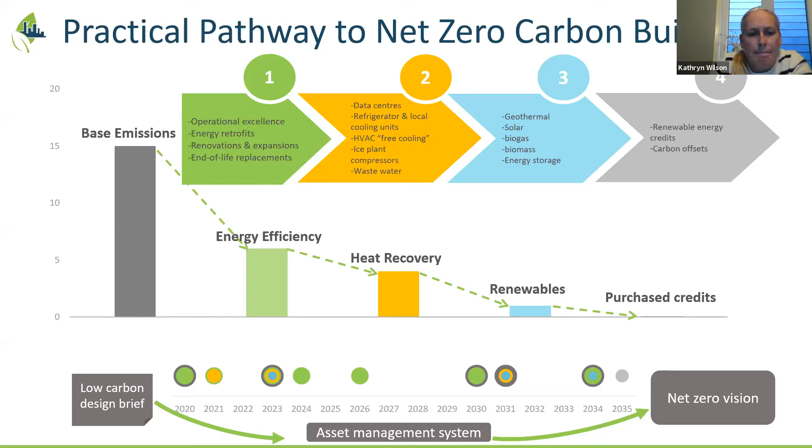Here are some of the objectives of the pilot.

So really to set carbon reduction targets for ice rink facilities, to determine a roadmap to achieving the targets in a financially sustainable manner, test the 4-phase approach that I just mentioned, and the net zero over time approach, build the case for low carbon measures by comparing business as usual with the best possible low carbon measures, introduce the integrated design process into measure development, compare ice rink performance metrics to evaluate ice rink building systems and identify opportunities for operational improvements and or better efficiency when replacing equipment, and support municipalities in planning equipment renewal in advance.

So lots of objectives here.

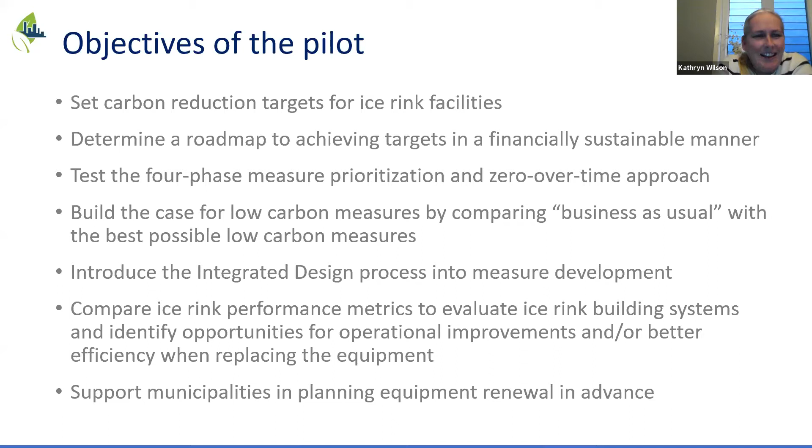I'd now like to turn it over to Frank Cammalleri to speak to the pilot. Great, thanks, Kathryn. Appreciate it.

Yes, so again, just reiterating and highlighting the challenging times we face today. This is a very important cohort project, and we're really happy to announce the findings that net zero carbon emissions is achievable and is financially feasible in municipal ice rinks, point blank. So that's a big accomplishment. We're very happy with the results of this, and we'll go into more detail further down the slides.

But it does require a more comprehensive evaluation of measures, looking at life cycle costing and accounting for total cost of ownership, like maintenance costs, timing of measures with capital renewal, and planned capital investments over time.

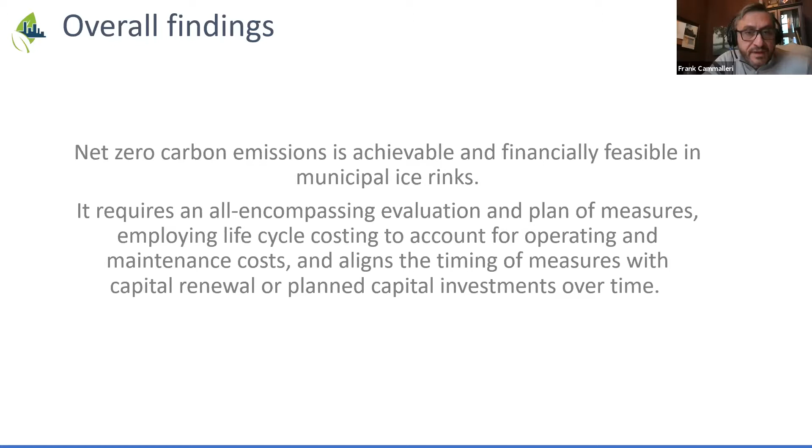So starting off with greenhouse gas emissions, sort of the big key aspect right now is that's really forcing us to focus on climate change here. So again, highlighting that quite considerable emission reductions were achieved with this study.

We see them hovering around closer in the 90 to 95% range on average before having to resort to purchasing carbon offsets. So we think that ice rinks and the findings of this cohort project have come to a very promising outcome that target emission reductions can be quite significant if you look at things from a low carbon perspective.

Want to quickly highlight a couple of anomalies or items that stand out. The 26% reduction in emissions - just want to highlight that ice rink number 9 only considered operational measures, so it's good to highlight why that is lower than the rest of them. In that specific rink, there was some uncertainty associated with the life of the complex past, say, 5 years. But it's good to know that just operationally, operational changes can achieve as much as a 26% reduction in emissions.

So great accomplishment here. We're really happy, and we're a little bit surprised, I have to say, that you could achieve such large emission reductions without having to resort to purchasing carbon offsets.

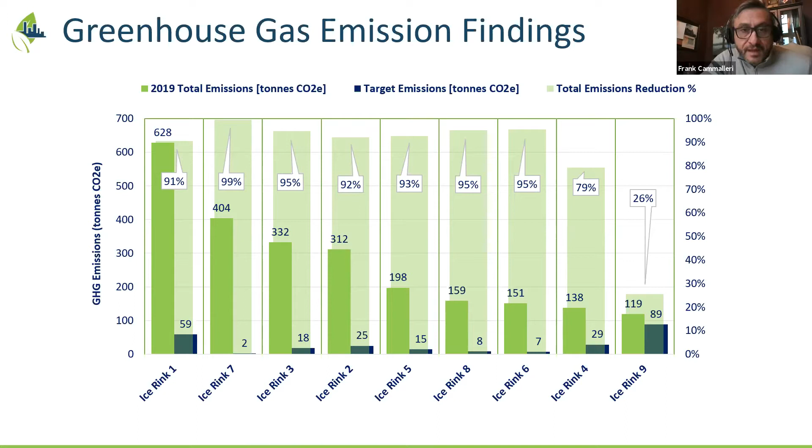As Kathryn mentioned earlier, our ultimate goal is energy emission reductions, but it starts with energy efficiency improvements. Findings show that through the 9 ice rinks that participated, we can achieve quite significant energy reductions, typically ranging from 58% to 85%.

This resulted in an overall energy use intensity reduction of 80.7% — quite significant. The approach taken was electrification, getting totally off of gas, or at least presenting options that would give municipalities the ability, a roadmap, to get totally off of natural gas.

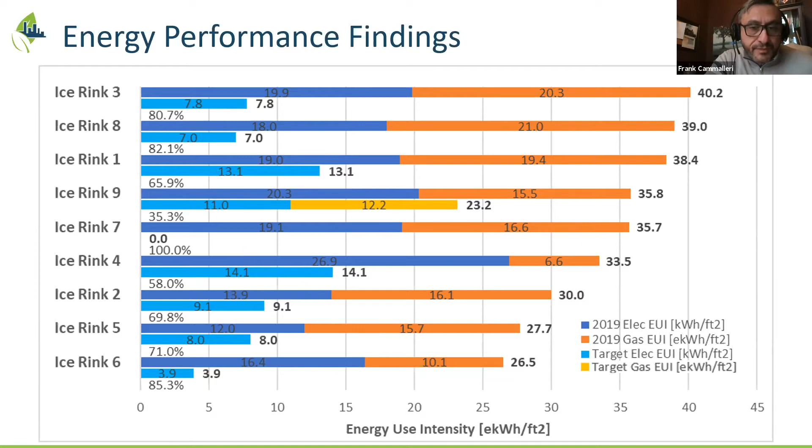Consistent with the FCM, Federation of Canadian Municipalities, approach, and supported by that program for this cohort project, we looked at 3 scenarios: the business as usual measure, the low carbon approach without funding, and, fortunately, with some good information from the release of funding, low carbon with funding, which was actually released in April this year. We decided to include that as part of the analysis as well.

Next slide. So, business as usual — a little background on that. What we included here were just standard like-for-like replacements with equivalent equipment, no optimization of existing systems. So when we refer to operational improvements, none of that was incorporated here. No heat recovery was contemplated in this scenario, nor were any renewables contemplated. It's the typical business as usual approach without considering any low carbon or high energy efficiency type measures.

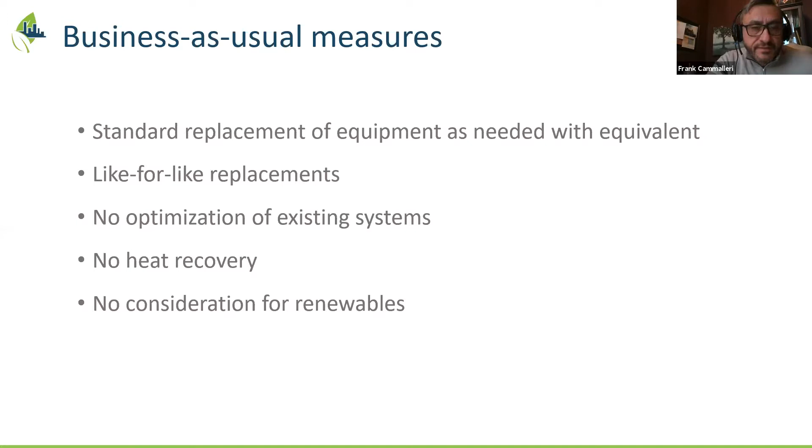Next slide, please. The low carbon approach without funding. Essentially, the approach taken for this scenario was looking at maximizing energy efficiency, using heat recovery, and replacement of equipment at end of life. That was the general approach we took. We implemented, or contemplated implementing, operational measures first, consistent with the four-phase approach Kathryn highlighted — making your building as efficient as it can be with the equipment you have — and then also taking into consideration measures that are both technically and financially viable immediately.

Things that come to mind are heat recovery, heat recovery on the refrigeration plant, as well as implementing a building automation system. So that's the point I'd like to make — that was the approach we took with this low carbon scenario, without funding, because it's self-sufficient without the funding that's currently available. Next slide.

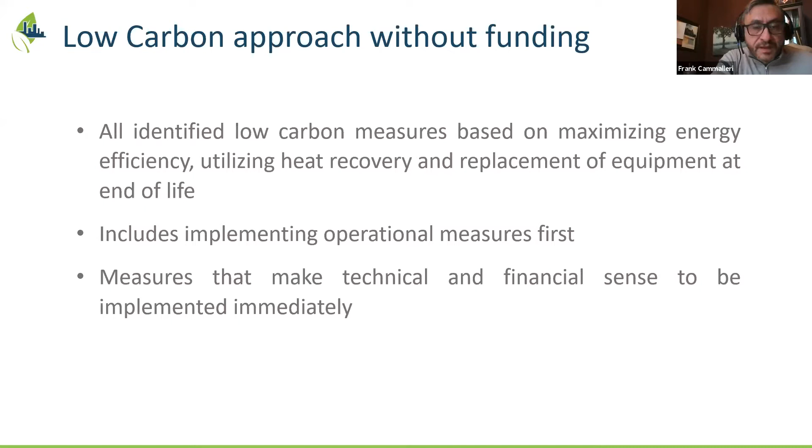So the low carbon with funding is essentially the same approach as the low carbon without funding, except that we're taking into consideration the GICB funding that's available. Most of you are likely aware of that, I know FCM - many of you are aware of that very attractive funding that funds up to 80% of the capital investments, but requires an accelerated implementation by end of March 2026. This generally accelerated the replacement of equipment before end of life. Typically, end of life equipment that may have been a few years out from 2026 was fast tracked to take advantage of this very attractive funding currently available.

Great, next slide. So starting off and highlighting the findings, the low carbon approach or creation of a roadmap really requires the use of life cycle costing and net present value. This is fundamental to the decision-making approach, and after working with all the participants, we found that this is fairly well talked about but not really used, and requires transformational change in the way decisions get made in capital and equipment replacement in order to get to net zero.

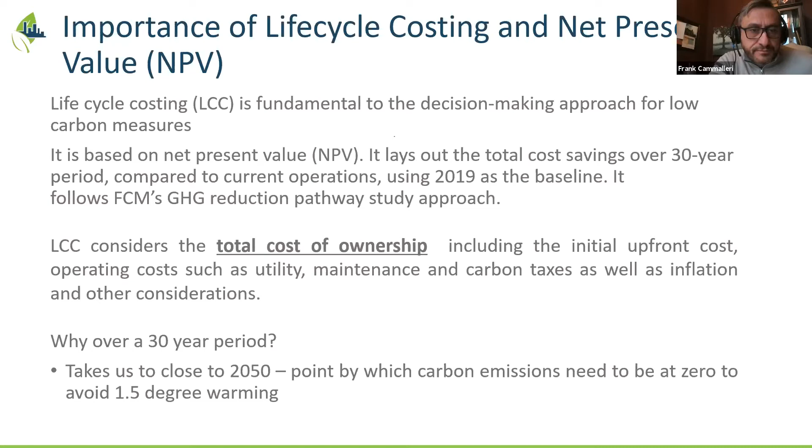Consistent with the Federation of Canadian Municipalities' approach required for their feasibility studies, we adopted that same approach, taking into consideration many factors. As I mentioned, life cycle costing is a fairly comprehensive approach. It takes into consideration inflation, as you can see there with the assumptions. This was the best information we had available at the time, so we take into consideration escalation rates in different utilities, electric and gas being the major ones, escalation rates in labor and maintenance, discount rate - which has to do with the time value of money - and again the amortization period of 30 years, which we talked about why we chose.

Carbon pricing emissions - we referenced a document published recently in the spring, the most currently available information we had while undergoing the analysis of this cohort project. We want to highlight that carbon pricing in reality is built into the utility rates, but it was very difficult and challenging to determine or get any forecasts from utility companies regarding electric, gas, and water rates that take into consideration carbon pricing. So we did quite a bit of sensitivity analysis to the escalation rates, and concluded that even with the sensitivity analysis, the outcome really wasn't any different, although the financials changed a bit - the decisions that resulted from it didn't change basically. We just want to highlight that's the approach we took in light of the difficulty of separating or keeping carbon pricing built into the utility rates.

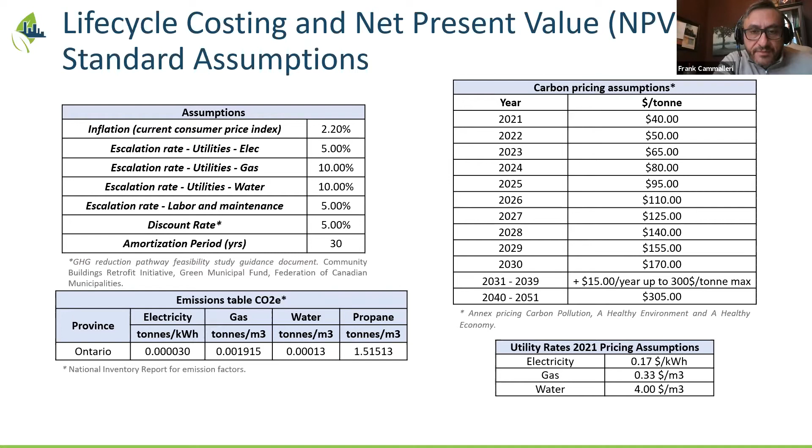Okay, next slide. So this is an aggregate of all the findings from the cohort project. We've broken it down by system type, and this is again an aggregate, an accumulation of all the ice rinks and the recommendations that were made for each one of them all together.

So we present the three options, the three different scenarios - we look at business as usual, the low carbon approach without funding, and the low carbon approach with funding. We've prioritized them, listing them in order of absolute carbon emission reductions, so you can see the refrigeration plant measures have the biggest emission savings from the cohort project. A good way to interpret this, now that we're getting into life cycle costing and the decision-making process, is that the approach essentially took the cost in today's dollars with respect to the current state of the facility.

So in the business as usual scenario, you'll see negative net present value because you'll be replacing equipment without any savings associated with it. That's why you see a negative cost there, a negative NPV, because you're actually replacing equipment without any savings to offset that cost.

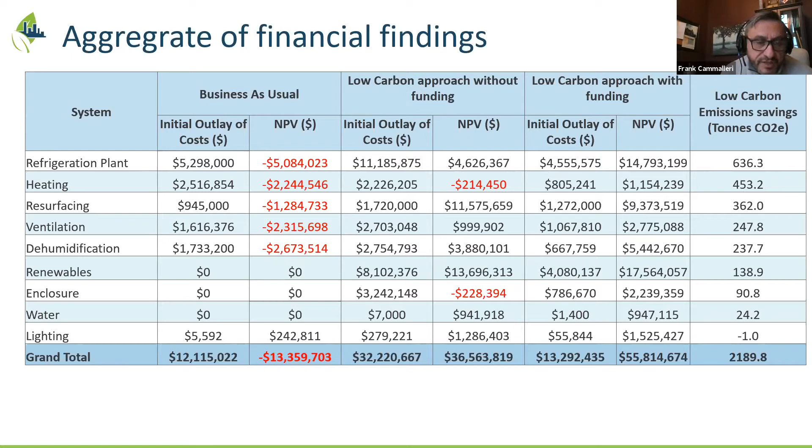This whole approach we've highlighted from the beginning is really about carbon reduction over time, trying to do so in a sustainable manner. So let me explain this graph a little bit. This is over time, over the 30-year period we examined from 2021 to 2051.

The business as usual is the green line. You can see on the vertical axis there are emission reductions. For sake of simplicity, business as usual assumes no emission reductions over the current systems that exist. Then there's the low carbon approach without funding, the darker blue line.

You can see that gradually over time you get quite a bit of reduction, from 400 down to 45 — 45.9 in 2036 — and eventually down to zero by around 2041, specifically 2.4 tons of CO2 emissions in 2050. Again, this is just a sample participant roadmap, if you will.

The lighter blue is the low carbon with funding. Basically, as we mentioned earlier, because we're fortunate enough to have a fairly attractive funding mechanism available, the green and inclusive community buildings funding available that pays up to 80%. The recommendation we made is we fast-tracked a bunch of the capital expenditure, so you can see a lot of the carbon reductions happening a little bit early, because instead of waiting for end of life to replace the equipment, you have this incentive, this funding mechanism that's very attractive, paying up to 80%. Fast tracking it by 2026, there's quite a bit of work that gets done, and you can see the carbon reductions accelerated quite considerably between the dark and the blue.

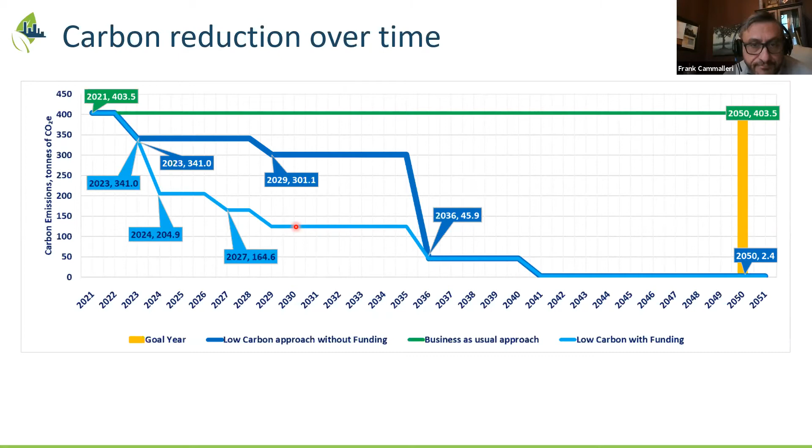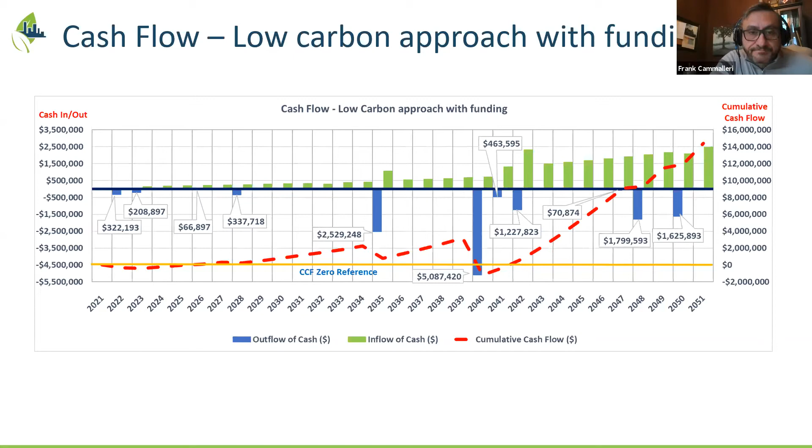Okay, so just a little bit more about the wide range of different participating ice rinks. There were nine ice rinks that formed part of this cohort project, but many of the ice rinks ranged quite considerably from one to the next. So we've got a good cross-section of the spectrum of different types of rinks out there, and we think we've got a good cross-section of what's out in the marketplace.

So a couple of items we wanted to highlight is they varied quite a bit in terms of ice pad square footage. You can see that it goes as low as 15,000 on ice rink number 8, right up until ice rink number 1 as high as 65,000. That becomes there's more ice pads, but generally the ice pads, even the size of the ice pads, varied a bit from one to another. A lot of the ice pad area differences come from the fact that they have more than one ice pad, or they have a combination of a curling rink slash ice rink pad.

Moving along on the columns, the area I like to focus on is the gross floor area. Gross floor area ranged quite a bit, from ice rink number 9 around the 35,000 square foot range, which was mainly an ice rink with very little amenities - the main focus in that facility was just the ice rink, really, with a couple of meeting rooms and so forth. But as high as, in some cases like ice rink number 1, 151,000 square feet, which included several ice pads, but not only several ice pads, but also many other amenities like fitness rooms and community rooms and so forth.

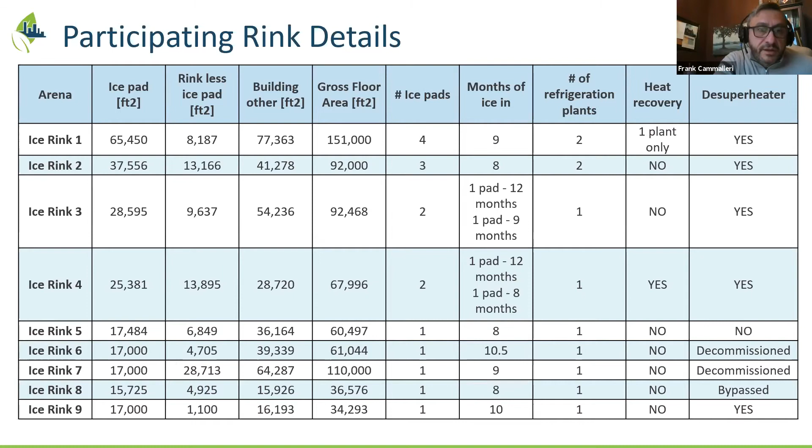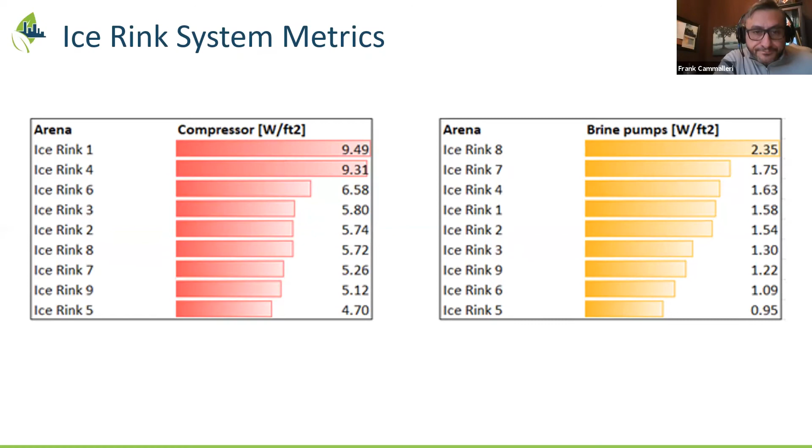Okay, next slide. Just continuing on with other key equipment there - dehumidifiers, again similar approach here. We got some ice rinks where the metrics are quite low, 0.12, 0.22, and most of them have no issues achieving the set points that are required.

But we want to highlight ice rink number 7. It's a bit of an anomaly in that sense, because it's a fairly large facility that is part of the OHL circuit, with a huge spectator area. So that's why you see it standing out, because it's combining dehumidification with ventilation requirements for the spectators. Again, just wanting to highlight that anomaly, but also give you some idea of how potential oversizing could occur in the other rinks.

So if you remove that anomaly, you can see the wide range of CFM per square foot of ice pad for these rinks, going from as low as 0.12 to 0.51, and the same thing on the fan side. Just showing that there's definitely oversizing going on, and those things need to be questioned every time, especially for end-of-life equipment.

What is the right size I need? Don't oversize things. And how do you deal with it in the meantime while making the most use until you get to end-of-life replacement? Same thing on the lighting pieces - you can see quite a bit of range of watts per square foot intensity. You see on the lower end 0.23 and 0.3. Most of those facilities have already converted most of their lighting to LED.

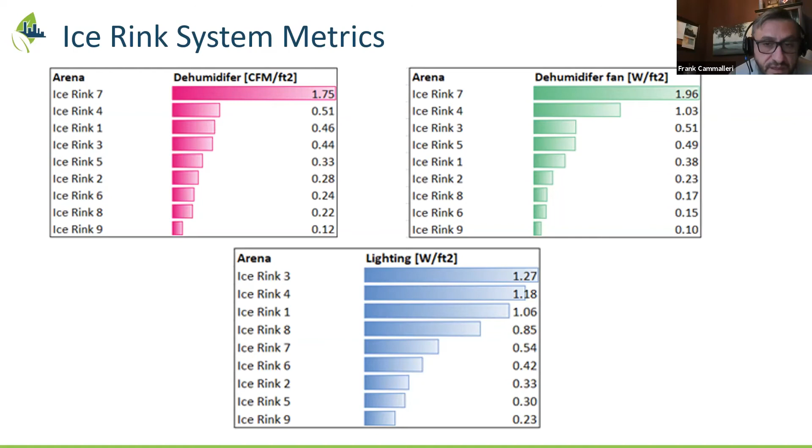It's also important to say that this natural tendency to over-design to be safe exists everywhere, including in lighting. Many facilities, even rinks 7 and 8, have LED lighting, but you need to question whether the conversion was done properly. Oftentimes you can end up with intensities twice as much as needed while still meeting the same light level requirements per building code and standards. So always question that, and make use of metrics to help make decisions when replacing equipment or redesigning, to ensure an optimal design, not extremely oversized.

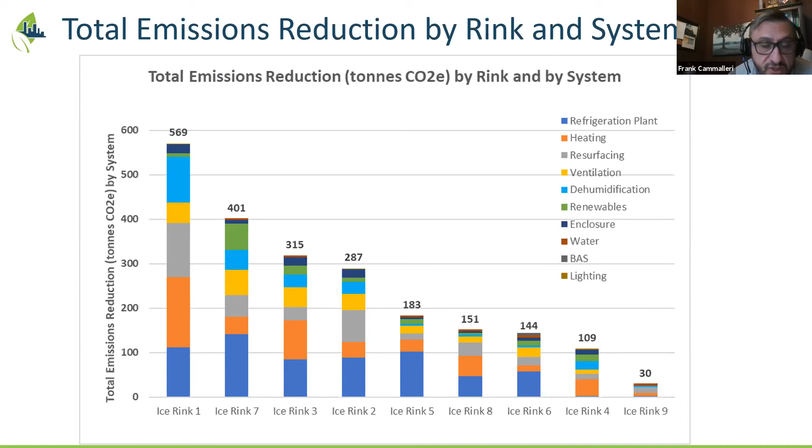Okay, next slide. This is total emission reductions in absolute value. Ice rink number 1 had the biggest absolute reduction, as much as 569 tons. Ice rink 9 shows mainly operational recommendations were made, still getting 30 tons, highlighting the many different systems that exist in a facility and where most of the emission reduction lies. You can see the refrigeration plant, the dark blue bar at the bottom, is one of the more significant ones, followed typically by heating. This is a cross spectrum of how each facility achieved reduction and the absolute magnitudes associated with each one.

Okay, next slide. This is the average savings associated with each system type, consistent with how we've listed them. The refrigeration plant on average in aggregate saved 29%, responsible for 29% of emission reductions, followed by heating at 21%, then resurfacing at 17%, followed by ventilation and dehumidification, and eventually lighting. The big contributors to emission reductions are really the refrigeration plant, heating, and resurfacing. We'll get into more detail on the measures, and the types of measures being recommended and considered under these categories.

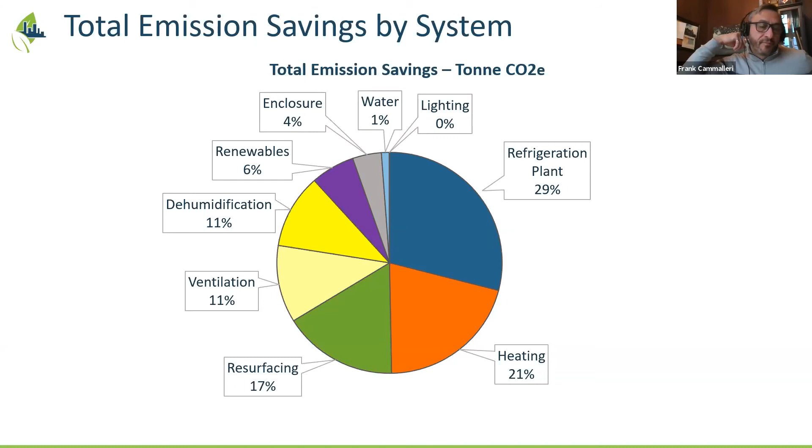Okay, next. Sorry, next. Yeah, there you go. So those were some high-level findings in terms of the cohort project and the individual ice rinks, and we'll get more into the individual measures.

Some key recommendations after completing this cohort project: the importance of getting organized, gathering data and documentation. We obviously had the pandemic to deal with, which complicated things further, but it emphasized even more how important getting organized is, and getting everyone involved. That's why this cohort project is turning out to be successful, as we're seeing many municipalities actually proceeding to implementation. It involved an integrated design process, aligning with the objectives, getting facility managers, capital folks, and operators involved in the decision-making process along the way, so everyone gets an opportunity to voice their concerns and you get buy-in, so it eventually gets implemented.

Also, understanding life cycle costing throughout this. We've had several discussions with municipalities; many people were exposed to life cycle costing, but none were implementing it to the fullest extent, not to the extent of using it to make decisions. We're happy that many were open and amenable to using that model, because that's the model you need when looking through the lens of trying to get to carbon zero, carbon neutrality. Quite a bit can be achieved with operational type measures - implement them right away, since those are usually low-cost or no-cost. Another really important finding: integrate the refrigeration plant with the other building systems, since they were very much operating in silos.

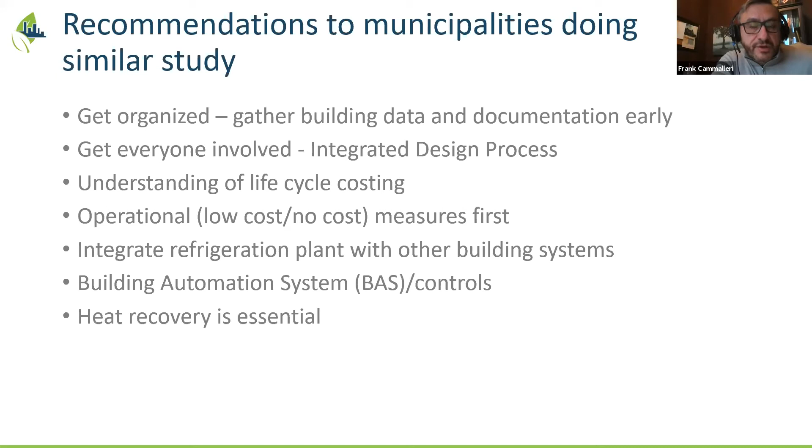Next slide, a little bit more on getting organized. We understand there are a lot of existing buildings, and it can be a fairly overwhelming task, but there are a lot of things that can be done in the meantime to get started.

These are the areas we'd recommend starting on immediately or as soon as possible, even if you may not get to these buildings for 2 or 3 years—really start getting the buildings and information ready that you need for performing the analysis. So building performance data, getting monthly data, interval data if available, the last couple of years, is always very helpful and useful for doing the analysis required to create a roadmap.

Tracking the performance is very, very important. Critical to this, as part of the cohort project, is the need for looking at the mechanical systems—the refrigeration systems are important. So assembling those drawings and having them readily available, so that when it comes time to do a more detailed roadmap, they're readily accessible.

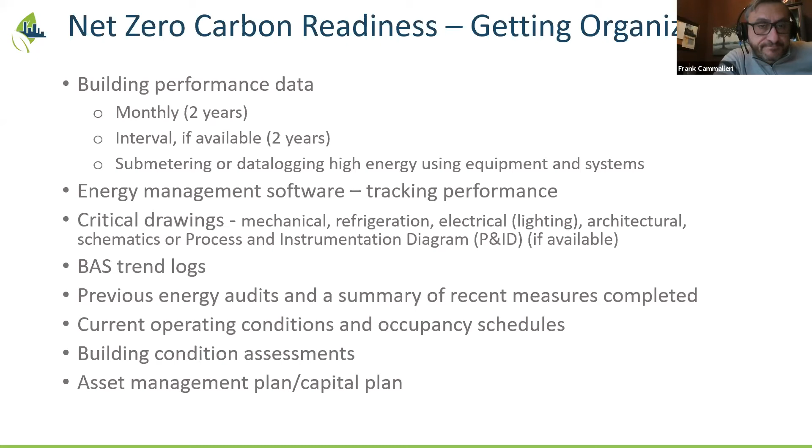To talk about this integrated design process—again, I mentioned it a bit beforehand—it's really getting everyone at the same table: the facility managers, building operators, energy managers, asset management, including the financial folks, the building modelers we had, and in conjunction with the technical advisory team, we had many players at the table throughout this whole process, and that's what makes it successful.

Having everyone at the table getting the expert advice you can, bringing them all together so people can ask questions and get their perspectives heard, and get concerns addressed as soon as possible, significantly improves the chances of success of making this roadmap work—so it doesn't just sit on a shelf, it's actually doable, and you get buy-in from all players.

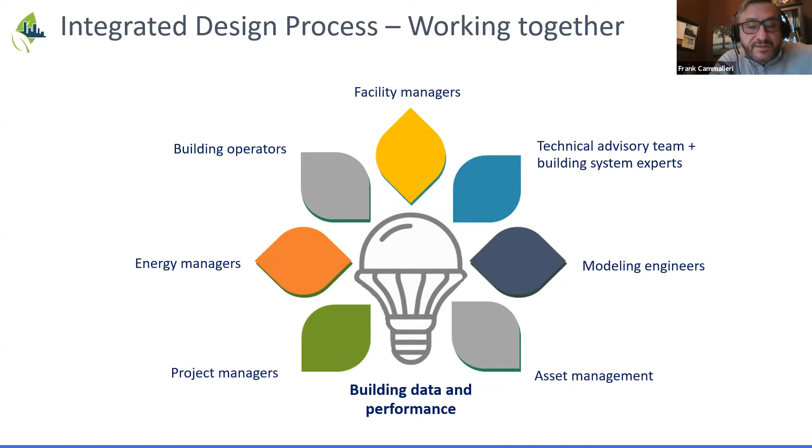So again, just highlighting this is a common theme in the program itself, and was, we believe, successfully used at this cohort project. Next.

So again, the continuous focus is on trying to do the operational low-cost measures first. Some of these items include optimizing ice temperatures based on ORFA recommendations. This is just a sample of a schedule that could be implemented, resetting the temperature up at night, up to 25, 26 degrees. Following ORFA standards, and what we've seen some rinks actually accomplish, adjusting ice thickness where possible to closer to 1.25 inches.

Again, you need to look at this with respect to your specific facility: adjustment of humidity set points, scheduling of buildings to operate just when needed, controlling light levels based on the activity type, whether it's a maintenance exercise or in between events, and reducing the need for water flooding by optimizing the amount of water used during the flooding process.

In all of this, especially in the operational pieces, operator training is critical. It's very easy to just make these recommendations and walk away. What's needed is actually working closely with the operators, understanding what concerns may arise initially, and dealing with them as they come, so operators have support along the way to make sure these measures get fine-tuned and end up being sustainable. That's really important.

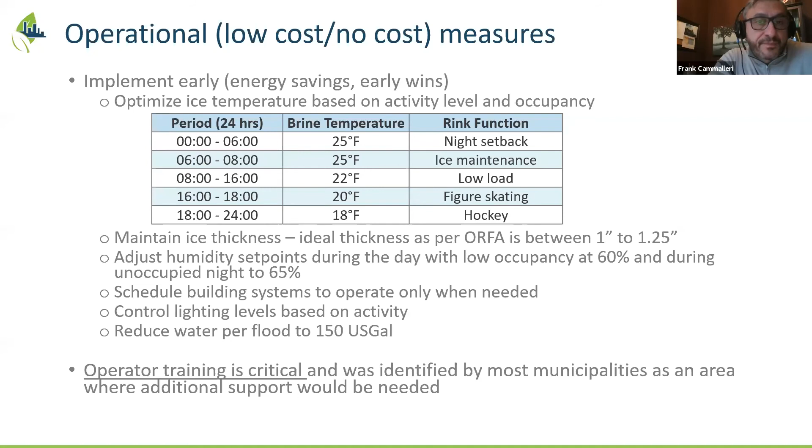I mentioned several times, building automation is critical. These days you need smart operations to make a building efficient. On some site visits, we had quite a bit of a mishmash of different types of systems out there. Many of the buildings had a control system on the refrigeration plant. What was very challenging was remote access, so hopefully ironing that out and figuring out how to get remote access early on is important.

I wanted to highlight that none of the systems were really integrated, the refrigeration plant with the building HVAC system, so they kind of operated more in silos. Many of the facilities didn't have a building automation system for the rest of the facility. So some key observations, and the importance of getting the BAS into these systems as soon as possible. The strategies needed optimization, and we realized that even buildings that did have BAS weren't optimized, which is very common, not fully taking advantage of occupied and unoccupied smart strategies. Definitely an opportunity for improvement.

There's also a need for setting up trend logs and archiving. We found that systems with a good refrigeration control system had some good trend logs, but many didn't. So we recommend setting up these trend logs and making sure they're archived for future reference. Next slide.

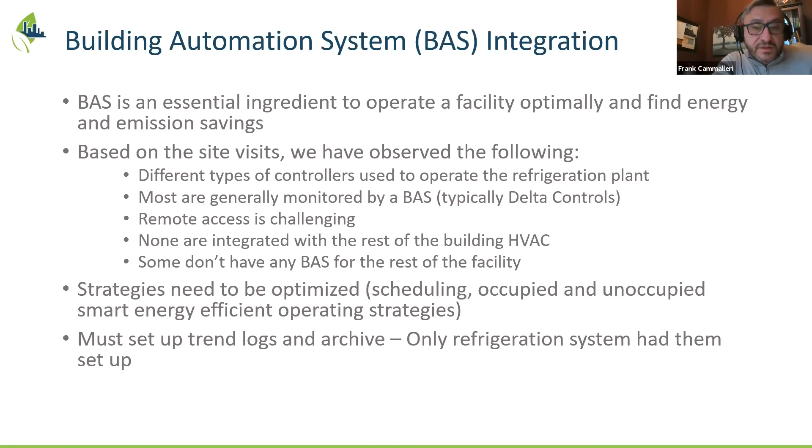A little bit more detail on the building automation system: 8 of the 9 rinks in the pilot did not have BAS systems that covered the whole building pretty well. As mentioned, there's only one building that really had a comprehensive system that served both the refrigeration plant and the rest of the building.

Most of them had the capability of capturing trends from the refrigeration plant, but about half really didn't. Trends were difficult to get; many required actually physical visits to the site because remote access was a problem. It was challenging to get trends, and many weren't even set up, and if they were set up, they weren't being looked at. So, coming out of this, it's really important to implement a whole-building BAS early on in the low carbon plan, which will really help get you on your way to achieving low carbon or zero carbon solutions in these ice rinks.

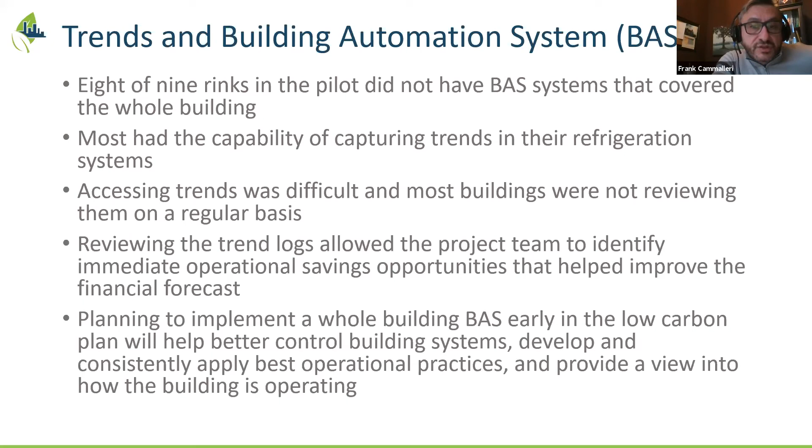Just a sample of what you can do once you have the trends. This is just one sample facility where we looked at the trend logs available. We were fortunate to have one plant with quite a bit of automation and quite a few points being monitored.

We could actually relate the refrigeration plant kilowatts to the occupied and unoccupied periods and the relative humidity set points. During occupancy, the green graphs show average relative humidity, and the dark square box shows the KW.

I think what's important to note in this specific situation, and how important the trend logs can be, is on the right hand side. You'll see that with a high relative humidity set point, focus on the 63.3% relative humidity and the 70.7 kW. You'll see that at that higher setting, the plant uses fairly low refrigeration energy.

Which is why we recommend resetting the relative humidity in this space, at least in this specific facility, a little bit higher during unoccupied periods. Again, this is just a sample of what you can do with the trends, but there are many things you can do once you have that information, and the data doesn't lie. It tells you the importance of what is actually happening, and the importance of monitoring afterwards, after you make changes, to make sure you achieve the desired outcomes.

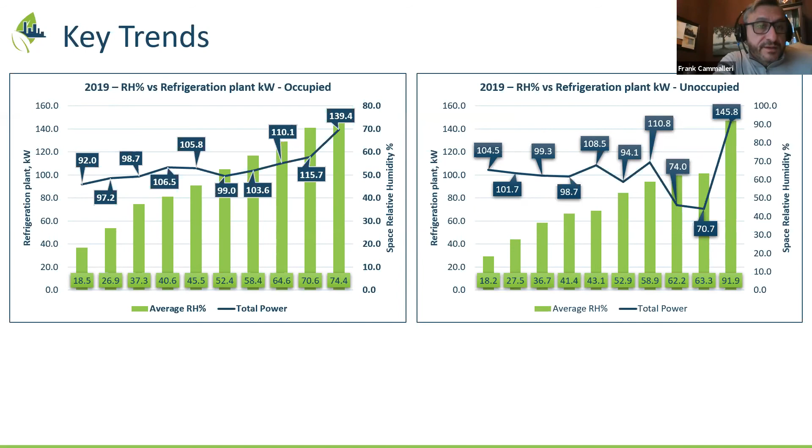So, high impact measures. Again, just want to highlight, I know we broke them up into categories, but heat recovery is by far the biggest component here. It accounts for huge emission reductions in absolute tons in this core project, responsible for 34% of the average emission reductions in each facility once heat recovery is implemented.

Replacing the gas boiler with electric is also another significant one, and we'll get into that a bit more. Replacement of the ice resurfacing machine also has impact, but the building automation system is really critical because it's responsible for the smart operations. Then there are other things like cold water system resurfacing, as well as a bit of solar PV. But again, the big players are heat recovery and conversion to electrification.

And so those are the big ones. Again, we'll get into a little more detail on these measures, and I want to get through them quickly because we're running out of time.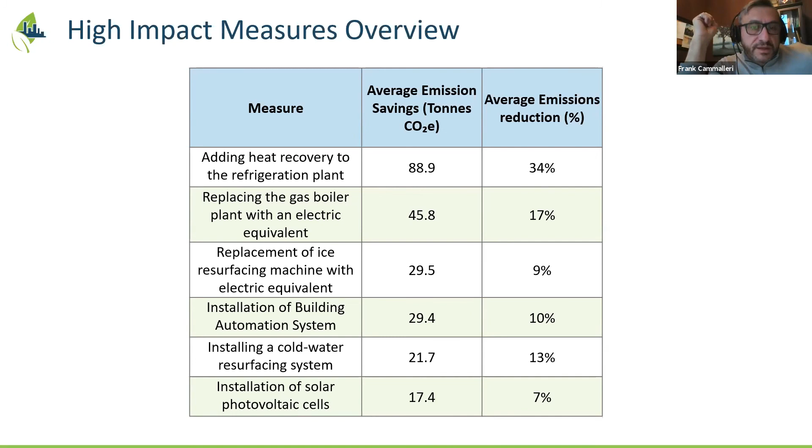So, refrigeration plant key measures: adding heat recovery is essential. Currently most facilities just throw the heat away, discarding it outside the facility, when it could be used within the facility. The biggest barrier in the past has been finding the right temperature quality to use it. But there are heat recovery chillers, high temperature heat recovery chillers, or heat pumps available today to elevate the temperatures from the refrigeration plant so they can be fully used with the existing building infrastructure.

There's also a need for adding ice storage to address misalignment of ice plant operations. For example, when we recommend resetting the ice temperature at night, the refrigeration plant isn't operating at that time, but that's when you need heat. So the use of ice storage allows the ice plant to operate, produce ice, and make use of the heat, then use that ice through the daytime. So there's an importance to using ice storage there.

Again, use of VFDs on brine pumps and compressors, which we talked about in the metrics, and optimizing sequences of operation are key fundamental measures included in the refrigeration plant. Next slide.

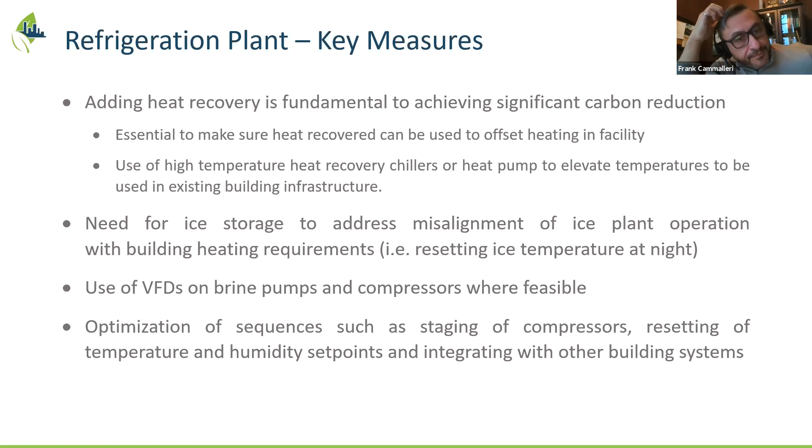On the heating side, number two in terms of impact on emissions, optimization is key. It's essential that a BAS really be used to control the boiler plant, most of which didn't have one. And even when you put in a BAS, smart operating strategies need to be used, like implementing unoccupied temperature setback and staging, to really optimize that operation and make it as efficient as possible.

A couple of the other key measures in this category are replacing spectator gas-fired infrared heaters. Most of the rinks, I think about 6 or 7 of them, had gas-fired infrared heaters, and the recommendation is to get them totally off gas and replace them with the electric equivalent.

Boiler plant replacement with an electrical equivalent. Again, that final milestone is to get them totally off gas, but you must ensure heat recovery is installed first, so that all the electric boiler or electric heating equivalent is doing is just topping up.

You want to do that after the heat recovery is installed, so that you avoid a huge increase in utility costs. At least that's the way it was modeled, and that's what we're recommending going forward. One of the key aspects, a very sensitive issue and an ongoing thing during this journey to low carbon, is really understanding the electrical service needs of your facility. Electric equivalent boilers have a fairly large impact on the service, and in many cases might require an upgrade, which can be significant costs. Just something to be mindful of.

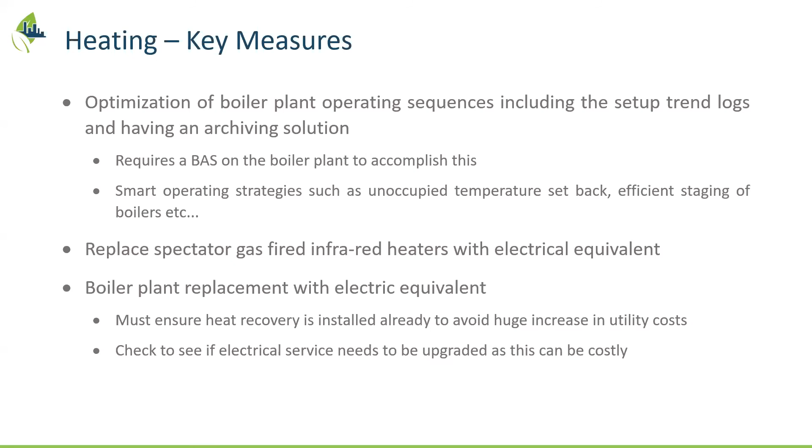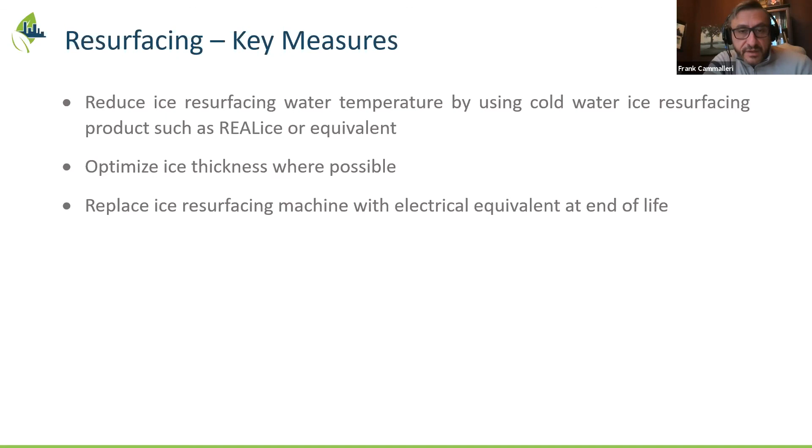Resurfacing again, a key measure as well: reducing ice resurfacing water temperature using cold water ice resurfacing technology, such as REALice or equivalent. That has a fairly large impact on emission reductions. We talked about optimizing the ice thickness where possible, according to ORFA standards, getting it down closer to 1.25 inches where possible. And in the end, replacing the ice resurfacing machine, many of which are currently propane or natural gas-fired, with electrical equivalents at end of life.

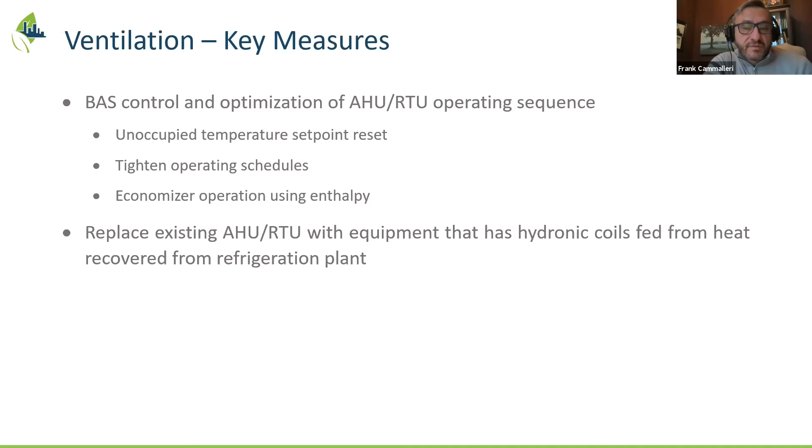Ventilation, again, always talking about optimizing the existing equipment, BAS control, optimizing the sequence of operation. Just some examples of the types of smart strategies that exist. And then when it comes time to replace the equipment, make sure you replace the existing air handling rooftop unit with equipment that has hydronic coils fed from the heat recovered from the refrigeration plant, again making use of the heat you recovered from the refrigeration plant.

Dehumidification - some key operational measures: resetting and using dew point control. During unoccupied periods, you can increase that a little bit, being mindful that you don't create any harm to the building structure. You don't want any condensation occurring, but definitely shut off the outside air. In many cases, you can shut off the dehumidifiers during this time, only calling them back up when and if the RH rises. We found that if you shut off the outside air portion of the dehumidifier during this time, there's very little occasion for the RH to rise in the facility.

Also, lower occupied set points during operation to ensure that fogging doesn't occur and ice quality is not compromised. Basically, increasing the RH to a point where it doesn't create any issues.

Leveraging outside air, more like an economizer approach, to help dehumidify where possible using enthalpy control. Consider retrofitting - we found a few situations with existing dehumidifiers that use gas-fired desiccant where you could instead use heat recovery, or higher temperature heat recovery from the refrigeration plant using a hydronic heating element, again trying to reduce the gas consumption for this dehumidification process.

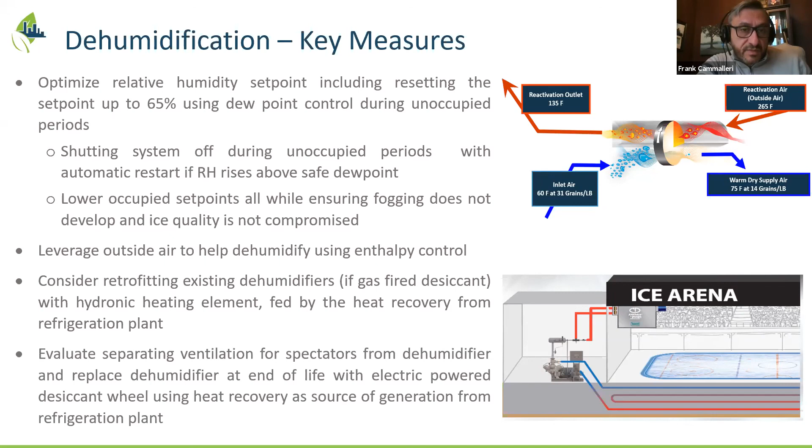One of the bigger findings on the dehumidification side was really evaluating separating ventilation needs for the spectators from the dehumidifier itself, and replacing the dehumidifier at end of life with an electric-powered desiccant wheel, using heat recovery as a source of generation from the refrigeration plant. Nowadays, desiccants can work with lower temperatures than were required when gas-fired desiccant dehumidifiers first came out, and that can be achieved a lot with the high temperature heat recovery chillers available to recover heat from the refrigeration plant. So again, some key items in the dehumidification measure category.

Next, renewables - we looked at several renewables. Geothermal and solar PV seemed to be the most suitable given the large roof area. Solar PV seemed to be the most financially attractive renewable for ice rinks - just to stress, this cohort project only had ice rinks, not ice rinks with pools or anything of that nature. Geothermal was analyzed in great detail, but it was not very economically viable given how much easier and more cost effective it is to get heat recovered from the refrigeration plant. Solar wall and solar thermal were also evaluated but deemed not very financially attractive. So bottom line on the ice rinks cohort project, solar PV seems to be the most attractive option, and something we recommend you look into in more detail.

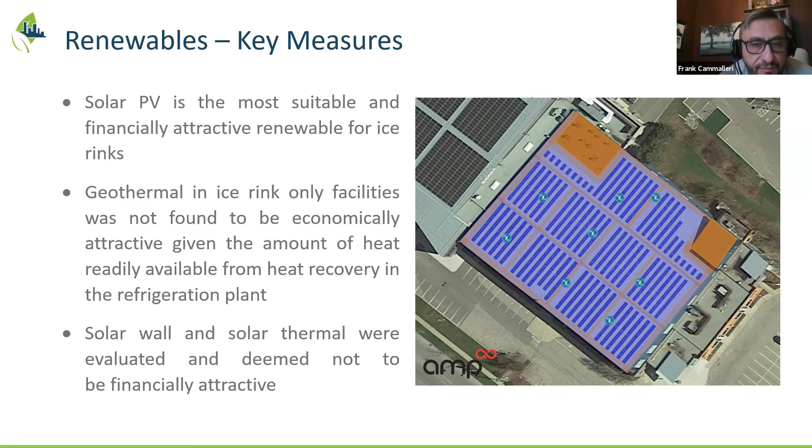Next, envelope - as we talked about before, there are a few of these, but the low-E ceiling is one that is very common in ice rinks. About half of them, I'd say about half, had them.

Just need to be mindful of potential obstructions and sprinklers, but most of the time this can be addressed, especially in community type rinks. We recommend working closely with the fire department and the low-E ceiling provider, but most of the time it can be very economical to do so.

Typically not very attractive and creates some technical issues in professional rinks where they need to have access to the steel, to the infrastructure underneath, and where there's lots of requirement to put up posters and marketing materials. So it may be problematic, but for the most part, in community type ice rinks, low-E ceilings do a great job of reducing emissions.

Again, other than low-E ceilings, typically envelope measures are not the most financially attractive. Usually these measures are driven by occupant comfort more so than emission reductions. Wall envelope insulation improvement and windows fall into that category, and are generally very costly to do. Just keep that in mind when you're evaluating. It doesn't mean they don't make sense, but the majority of them didn't really make much sense financially. Not the best way to get your emission savings - there are better alternatives to do so.

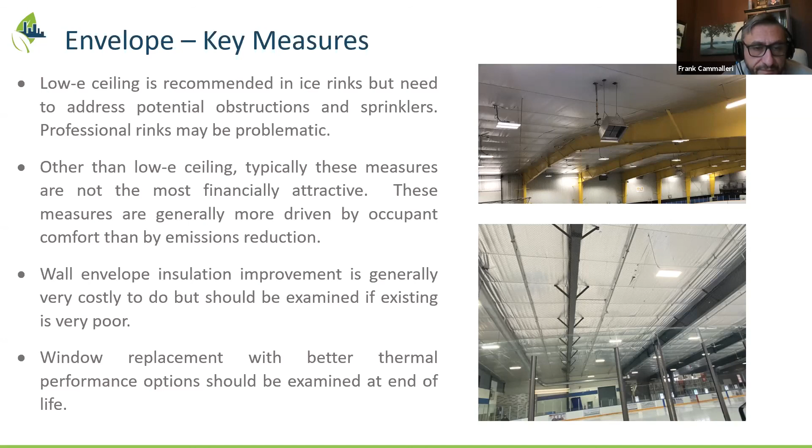Water, a few key items here. Again, reducing the water used for floods. We found many of the participants, not all of them, were using more water than is needed for flooding, and we can get them down to 150, and in some cases, getting it down closer to 100 US gallons per flood. The use of water efficient fixtures, low-flow toilets, and things of that nature would also be helpful.

Most of them actually had them already. Just something to point out, and I think the pandemic helped encourage that a little bit more too, especially touchless fixtures - they start and stop. Just be mindful that those types of fixtures need to be constantly monitored, because they can actually use even more water if they're not maintained properly.

And again, heat recovery - we talked about that. The fact that you're using heat recovery in the facility will reduce the use of the cooling tower, and in turn reduces water usage in those open cells. So these are some of the key measures in the water category.

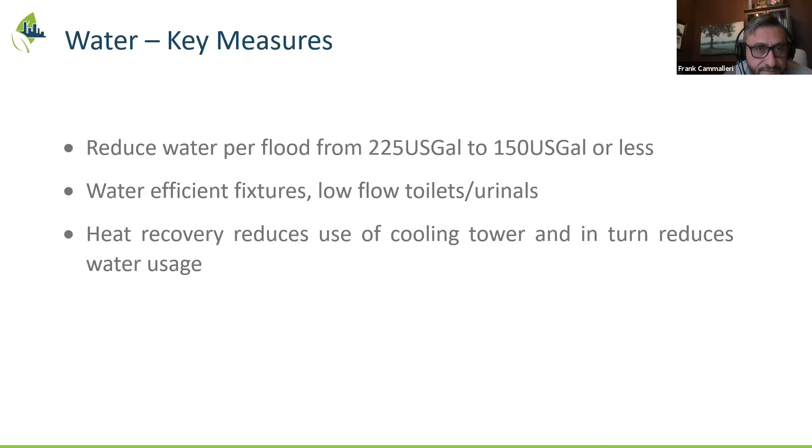Next slide. Lighting - so this is the last of the measures.

Lighting and lighting controls. Many of the facilities were already converting from fluorescent to LED. Many of them also had lighting controls, but they were being used to varying degrees. We recommended that they vary the light levels based on activity type and be consistent with that approach. Use of occupancy sensors - many facilities already used occupancy sensors to control lighting in intermittent use spaces like change rooms and washrooms.

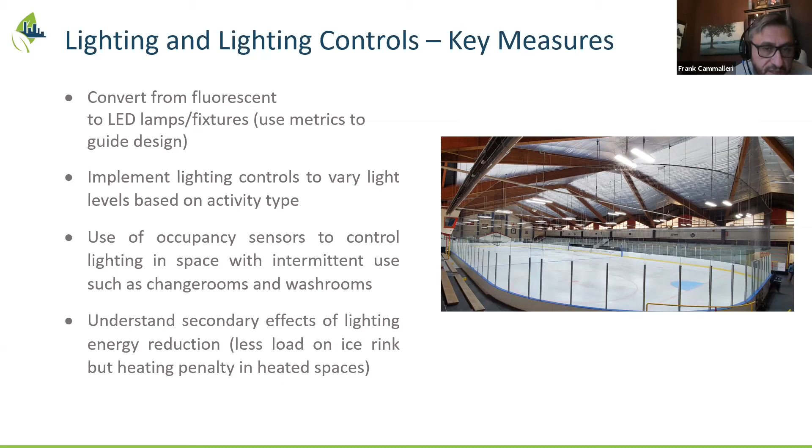Just need to understand the secondary effects of lighting energy reduction. It's great on the ice load - on the ice, it reduces the load - but in non-ice rink spaces that require heating during the heating season, it's actually a negative impact. You get an emission increase because of that. So just being mindful of that. I think that's it. Next slide.